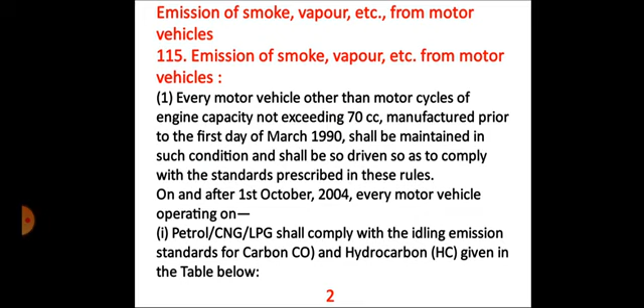On and after 1st October 2004, every motor vehicle operating on petrol, CNG, or LPG shall comply with the idling emission standards for carbon monoxide and hydrocarbon given in the table below. We can see the table for petrol, CNG, LPG driven vehicles.

We can see that for 2 and 3 wheelers of 2 and 4 stroke types manufactured on and before 31st March 2000, the carbon monoxide level should be less than or equal to 4.5%, and hydrocarbon, the N-hexane equivalent, should be 9000 ppm.

Similarly, for 2 and 3 wheelers, 2-stroke vehicles manufactured after 31st March 2000, the carbon monoxide level was determined as 3.5%, and for hydrocarbon the limit in ppm was decided as 6000. Similar provisions were made for 2 and 3 wheelers, 4-stroke.

Then came the Bharat Stage 2 compliant 4 wheelers, that was only 0.5% carbon monoxide and 750 ppm of hydrocarbons. For 4 wheelers other than Bharat Stage 2, it was 3% carbon monoxide and 1500 ppm of hydrocarbon.

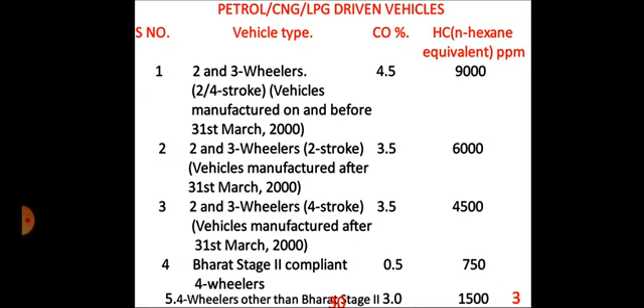The test shall be carried out using the instrument type approved as per Rule 116(3) of the Central Motor Vehicle Rules 1989, normally abbreviated as CMVR, with the vehicle engine warmed up after a run of minimum 15 minutes on a variable course under normal traffic conditions.

During the test, the vehicle engine shall be running at idling speed and the sampling probe shall be inserted into the vehicle exhaust system to a depth not less than 300 millimeters.

In case carbon monoxide and/or hydrocarbon emission values recorded during the test are not within the limits, the testing shall be discontinued and the vehicle owner shall be advised to resubmit the vehicle after repair or service.

The idling emission standards for vehicles when operating on compressed natural gas (CNG) or liquid petroleum gas (LPG) are prescribed separately.

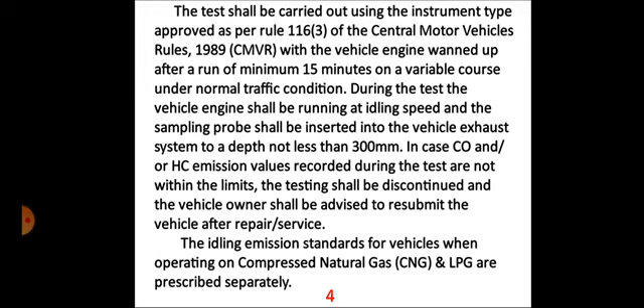Smoke density for all diesel driven vehicles shall be as follows: the method of test is the free acceleration test, for turbocharged engines and naturally aspirated engines. The maximum smoke density is given in two parameters: one is the light absorption coefficient and the other is Hartridge units. The first value is 2.45 and the other is 65.

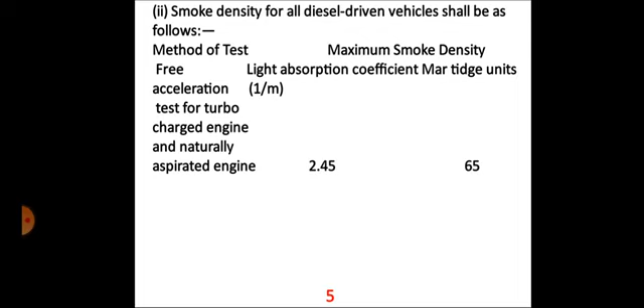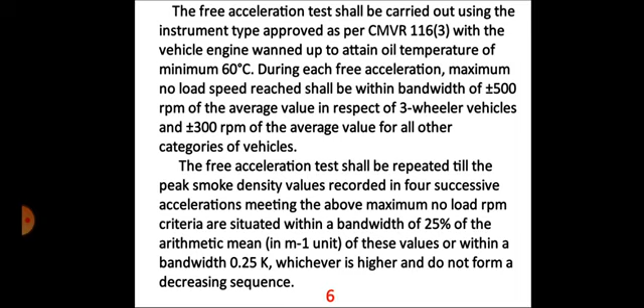The free acceleration test shall be carried out using the instrument type approved as per CMVR Rule 116(3), with the vehicle engine warmed up to attain an oil temperature of minimum 60 degrees centigrade. During each free acceleration, the maximum no-load speed reached shall be within a bandwidth of plus minus 500 rpm of the average value for three-wheeler vehicles, and plus minus 300 rpm of the average value for all other categories of vehicles.

Bharat Stage Emission Standards, shortly called BSES, are emission standards instituted by the Government of India to regulate the output of air pollutants from compression ignition engines and spark ignition engine equipment, including motor vehicles. The standards and the timeline for implementation are set by the Central Pollution Control Board under the Ministry of Environment, Forest and Climate Change. The standards, based on European regulations, were first introduced in 2000.

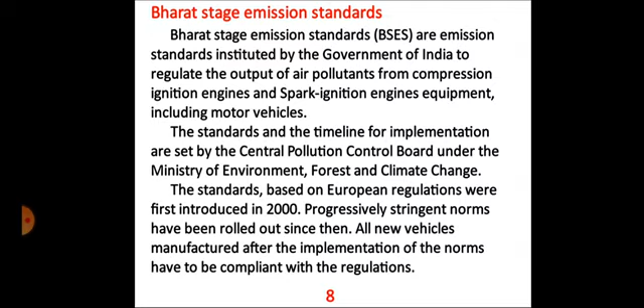Progressively, stringent norms have been rolled out since then. All new vehicles manufactured after the implementation of the norms have to be compliant with the regulations. Since October 2010, Bharat Stage 3 norms have been enforced across the country. In 13 major cities, Bharat Stage 4 emission norms have been in place since April 2010, and it was enforced for the entire country since April 2017.

In 2016, the Indian government announced that the country would skip the BS5 norms altogether and adopt BS6 norms by 2020. In its recent judgment, the Supreme Court has banned the sale and registration of motor vehicles conforming to the Bharat Stage 4 emission standard in the entire country from 1st April 2020.

Difference between Bharat Stage 4 and Bharat Stage 6. Both BS4 and BS6 are unified emission norms that set the most permissible levels for pollutants emitted from an automobile or two-wheeler exhaust. Compared to BS4, BS6 emission standards are much stricter, and makers use this transition to update their vehicles with new options and safety standards.

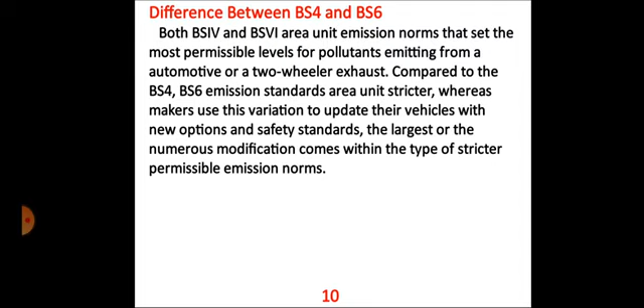The largest or most numerous modification comes in the form of stricter permissible emission norms. The table below indicates the modification in the permissible emission levels of BS6 vehicles compared to BS4 vehicles, across two parameters: fuel type and pollutant gases. The comparison between BS6 and BS4 has been shown for petrol and diesel operated vehicles separately.

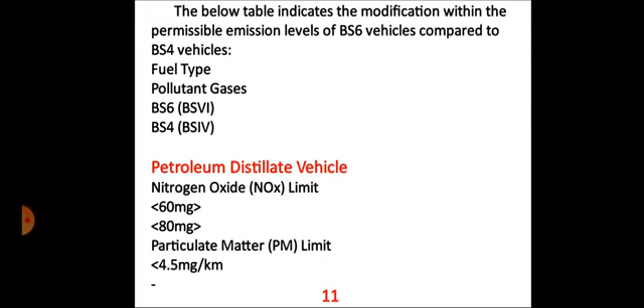For petrol vehicles, the nitrogen oxide limit in the case of BS6 is 60 milligrams, while it was 80 milligrams in BS4. The particulate matter limit was 4.5 milligrams per kilometer in BS6.

In the case of diesel fuel vehicles, the nitrogen oxide limit is 80 milligrams under BS6 standards, while it is 250 milligrams under BS4 standards. The particulate matter limit is 4.5 milligrams per kilometer under BS6 standards, while it was 25 milligrams under BS4 standards.

Regarding the hydrocarbon plus nitrogen oxide limit, it is 170 milligrams per kilometer under BS6 standards, while it was 300 milligrams under BS4 standards.

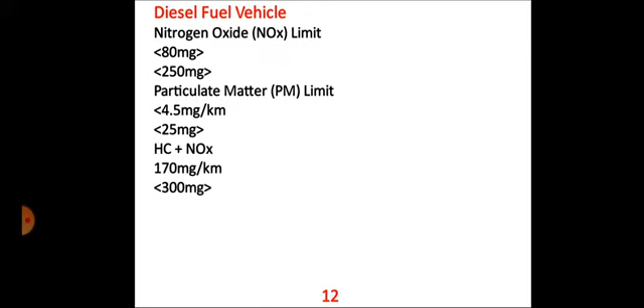The following table shows Indian emission standards for four-wheeled vehicles.

India 2000, equivalent to Euro Stage 1, was implemented in 2000 nationwide. Bharat Stage 2, equivalent to Euro 2, was implemented in 2001 in NCR, Mumbai, Kolkata, and Chennai. In 2003, it was extended to NCR and 13 other cities.

Bharat Stage 3, in reference to Euro 3, was implemented in 2005 in NCR and 13 cities, and later it was implemented nationwide.

Bharat Stage 4, with reference to Euro 4, was implemented in NCR and 13 major cities in 2010, while it was enforced nationwide from 2017.

Bharat Stage 5, in reference to Euro 5, was skipped by the Indian government due to lack of time. Bharat Stage 6, with reference to Euro 6, has been implemented in 2018 in Delhi, 2019 in NCR, and

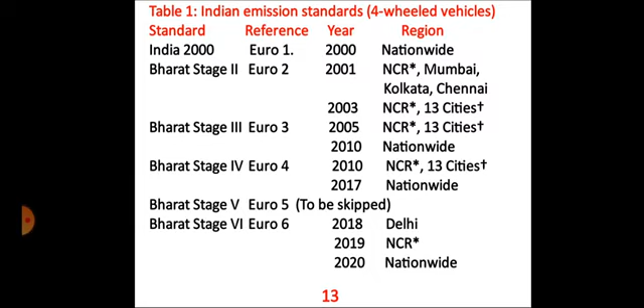in 2020 across the whole nation. Here, NCR refers to the National Capital Region, Delhi, and the other 13 cities are Bombay, Kolkata, Chennai, Bangalore, Hyderabad, Ahmedabad, Pune, Surat, Kanpur, Lucknow, Sholapur, Jamshedpur, and Agra.

The above standards apply to all new four-wheeled vehicles sold and registered in the respective regions. In addition, the National Auto Fuel Policy introduces certain emission requirements for interstate buses with routes originating or terminating in Delhi or the other 10 cities.

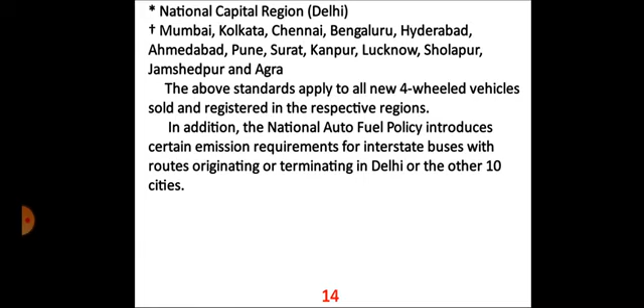Table 2: Indian emission standards for two and three-wheeled vehicles. Bharat Stage 2, with reference to Euro 2, implemented from 1st April 2000. Bharat Stage 3, with reference to Euro 3, implemented on 1st April 2010. Bharat Stage 4, with reference to Euro 4, implemented from 1st April 2017.

Bharat Stage 6, with reference to Euro 6, from April 2020, with the mandate proposed in order to comply with BS4 norms. Two and three-wheeler manufacturers will have to fit an evaporative emission control unit, which should lower the amount of fuel that evaporates when the motorcycle is parked.

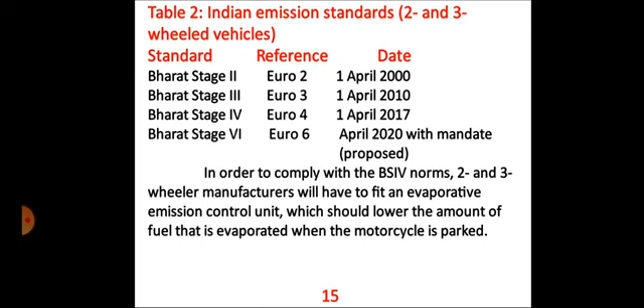Table 3 shows emission standards for diesel truck and bus engines, applicable to vehicles of GVW greater than 3500 kilograms, measured in grams per kilowatt hour.

Year 92 test basis was ECE R49. The limit of CO was 17.3 to 32.6, while hydrocarbons from 2.7 to 3.7. In 1996, the limit of carbon monoxide was set to 11.20, while hydrocarbons to 2.4, nitrogen oxide 14.4.

From 2000, with reference to Euro 1, the CO carbon monoxide limit was set to 4.5, hydrocarbon 1.1, and nitrogen oxide 8, and for the first time particulate matter was specified as 0.36.

The Euro 2, Euro 3 and Euro 4 references were also adopted in years 2005, 2010 and 2010 respectively, and the values of carbon monoxide, hydrocarbon, nitrogen oxide and particulate matter have been displayed in the table.

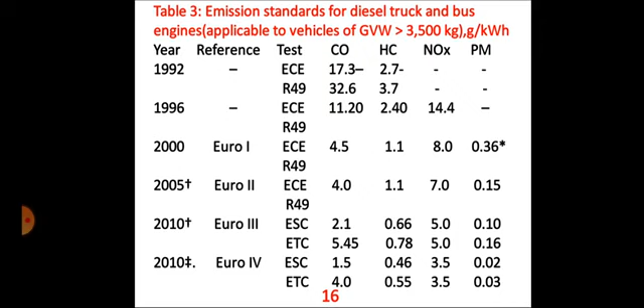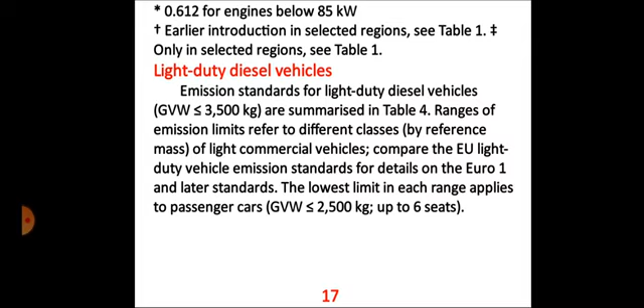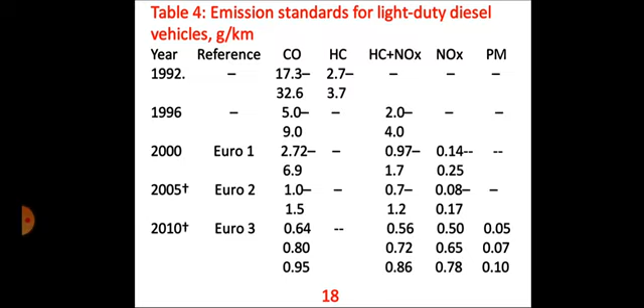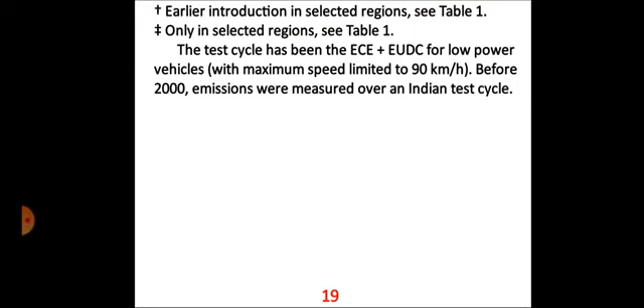The test cycle has been the ECE plus EUDC for lower power vehicles with maximum speed limited to 90 km per hour. Before 2000, emissions were measured over an Indian test cycle. Engines for use in light vehicles can also be emission tested using an engine dynamometer.

The emission standards for light duty diesel engines, we can see from the year 1992 to 2005, that is Euro 2, carbon monoxide was shifted from 14 to 4 in the case of Euro 2, and in comparison to 3.5 hydrocarbon in 92,

the limit was set to 1.1 only in Euro 2, while nitrogen oxide, which was 18% in the case of 1992, was reduced to 7% only in the case of Euro 2, which was implemented from 2005, and particulate matter was only 0.15 in the case of Euro 2.

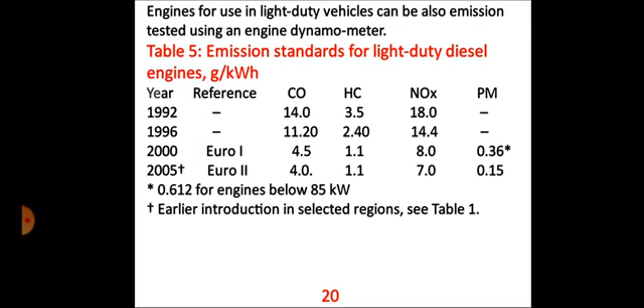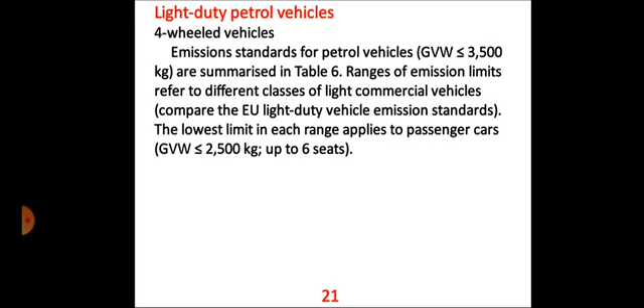Light duty petrol vehicles, four-wheeled vehicles: emission standards for petrol vehicles with GVW less than 3,500, and the lowest limit in each range applies to passenger cars, that is GVW less than or equal to 2,500 kg, up to 6 seats.

You can observe the standards, emission standards for petrol vehicles. In this case, from year 1991 to 2010, that is up to Euro 3, the carbon monoxide value reduced to 2.3, hydrocarbon 0.2, no hydrocarbon and NOx combination was recommended, and nitrogen oxide was reduced to 0.15.

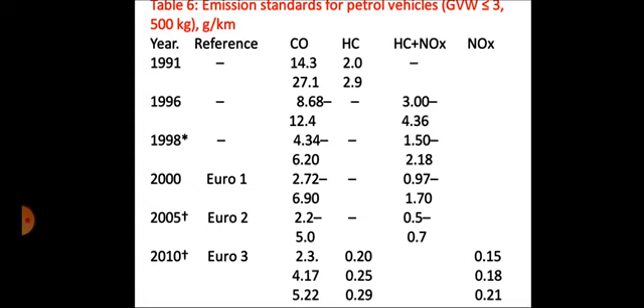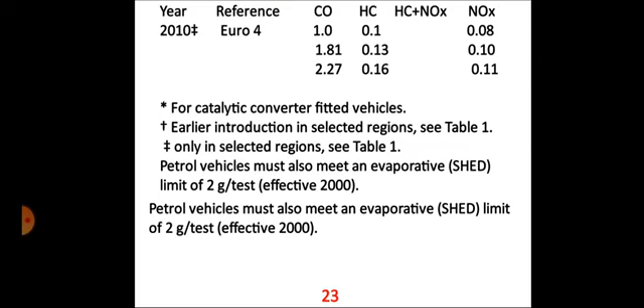In the year 2010, Euro 4, carbon monoxide 1, hydrocarbon only 0.1, and nitrogen oxide is only 0.08. Petrol vehicles must also meet an evaporative limit of 2 gram per test, effective from 2000.

Table 8 indicates the emission standards for two-wheeled petrol vehicles from year 1991 to 2010, that is BS3 implementation. We can see that in 1991 the carbon monoxide value was 12 to 30%, while it reduced in the BS3 case to only 1%. And in fact hydrocarbon was

discontinued from 1996 itself, while hydrocarbon and nitrogen oxide, firstly given a limit of 3.6 in 1996, was reduced to only 1% in the case of BS3 implemented from 2010.

Emission standards for 2 and 3 wheel diesel vehicles, we can see for 2005 and 2010 implementation, that carbon monoxide reduced from 1 to 0.5, hydrocarbon plus nitrogen oxide reduced from 0.85 to 0.5, particulate matter reduced 50%, meaning 0.1 reduced to 0.05 only.

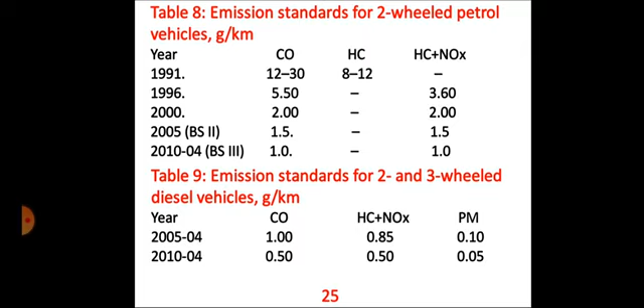Regarding carbon dioxide emission, the India auto sector accounts for about 18% of the total carbon dioxide emission in the country. Relative carbon dioxide emissions from transport have risen rapidly in recent years, but unlike the European standards, currently there are no standards for CO2 emission limits for pollution from vehicles.

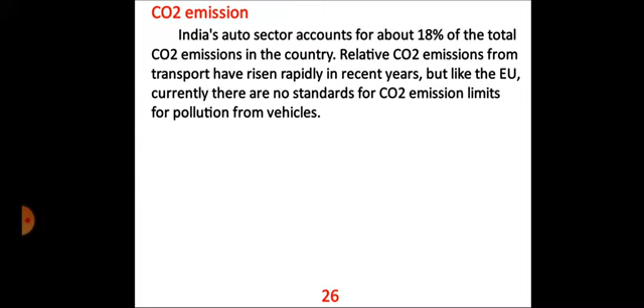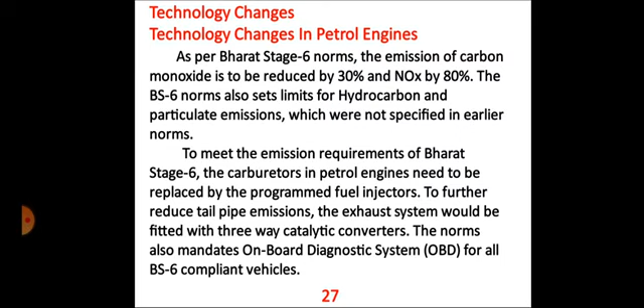To meet the emission requirements of Bharat Stage 6, the carburetors in petrol engines need to be replaced by programmed fuel injectors. To further reduce tailpipe emissions, the exhaust system would be fitted with three-way catalytic converters. The norms also mandate an on-board diagnostic system for all BS6 compliant vehicles.

Technology changes in diesel engines: as per the Bharat Stage 6 norms, the nitrogen oxide emissions from diesel engines are to be reduced by 70% and particulate emissions by 80%. To achieve this, engines need to be equipped with Euro 6 compliant technologies.

The major technical changes associated with this are: number one, fitted diesel pre-filters in the exhaust system; number two, using selective catalytic reduction or exhaust gas recirculation techniques to reduce nitrogen oxide in emissions; and thirdly, an on-board diagnostic system required to monitor the malfunctioning of parts related to emissions.

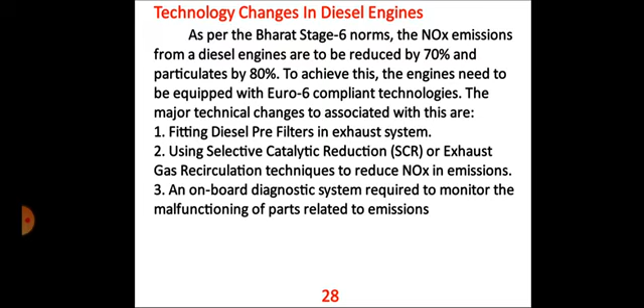Pollution Under Control, commonly called the PUC certificate, is an approval that the emission from a vehicle is under control and as per the pollution norms. It is an official document issued by the government after thorough verification of the vehicle's emission levels.

After the expiry of a period of 1 year from the date on which the motor vehicle was first registered, every such vehicle shall carry a valid Pollution Under Control certificate issued by an agency authorized for the purpose by the state government. The validity of the certificate shall be for 6 months. The certificate shall always be carried in the vehicle and produced on demand by authorized officers.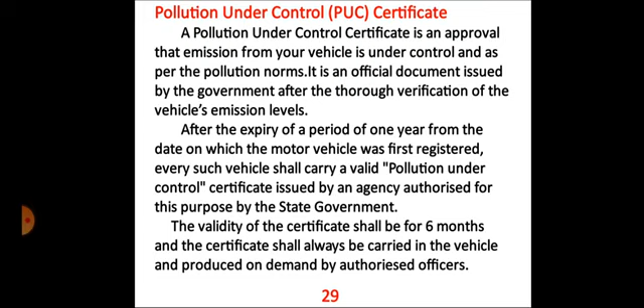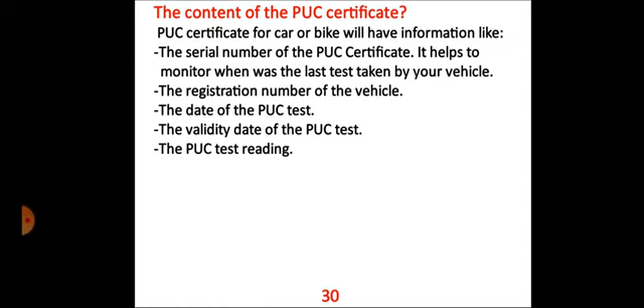The content of the PUC certificate: the PUC certificate for a car or bike will have information like the serial number of the PUC certificate, which helps monitor when the last test was taken by your vehicle, the registration number of the vehicle, the date of the PUC test, the validity date of the PUC test, the PUC test reading, and other general information like the name and mobile number of the vehicle owner.

If the vehicle is new, what is the PUC test procedure? If the vehicle is new, the motor dealer will arrange for the PUC certificate. For renewal, one will have to take the vehicle to any authorized petrol pump or authorized agency. They may scan the exhaust, commonly called the silencer, to check for the emission rate. The certificate is issued after payment of the prescribed fees.

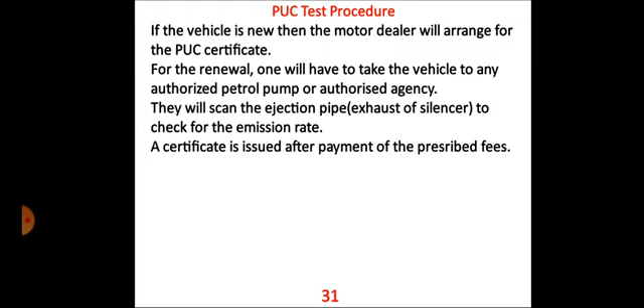Penalties for not obtaining a PUC certificate: just like one is penalized for not carrying a motor insurance policy, one will have to pay a fine for not carrying a PUC certificate. If it is not carried, then under section 190 number 2 of the Motor Vehicle Act, the person will be liable for prosecution. Other than this, a fine prescribed under rules will be charged for the first time offence. The fine is doubled if the act is repeated.

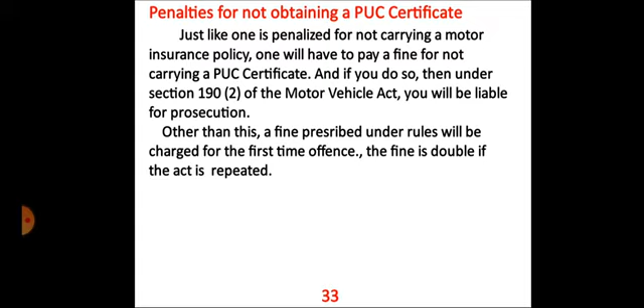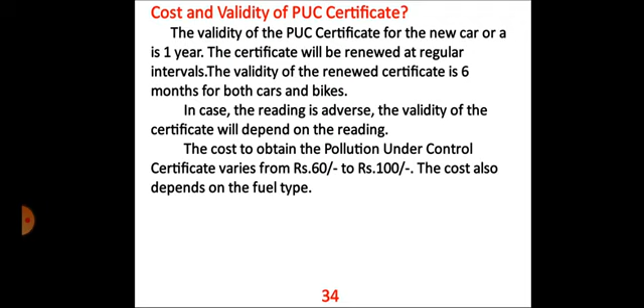Cost and validity of the PUC certificate: the validity of the PUC certificate for a new car is 1 year. The certificate will be renewed at regular intervals, and the validity of the renewed certificate is 6 months for both cars and bikes. In case the reading is adverse, the validity of the certificate will depend on the reading. The cost of obtaining a Pollution Under Control certificate varies from rupees 60 to rupees 100, and it also depends on the fuel type, being revised from time to time by the government.